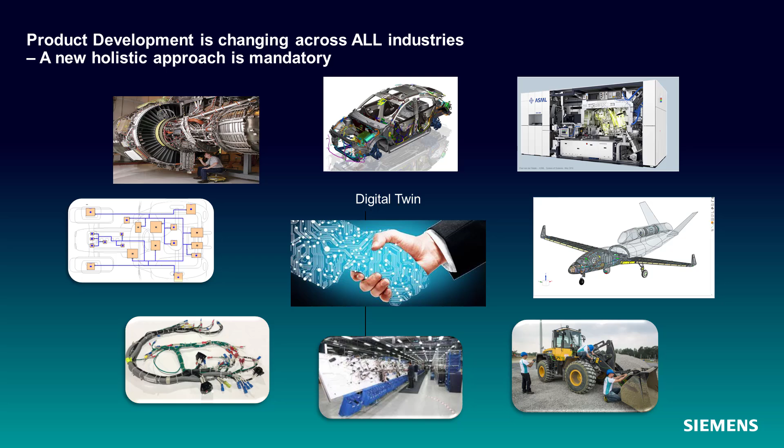To realize that digital twin, it's imperative that we diminish the boundaries between disciplines - mechanical, electronic, electrical, network, software, simulation - all these different environments we have walls that impede successful productivity and innovation. Correctly executed, we can remove those interdependencies, understand the handoffs between domains, establish traceability between them, and flow the data through to actually get to a product we can certify and know it did what it's supposed to do.

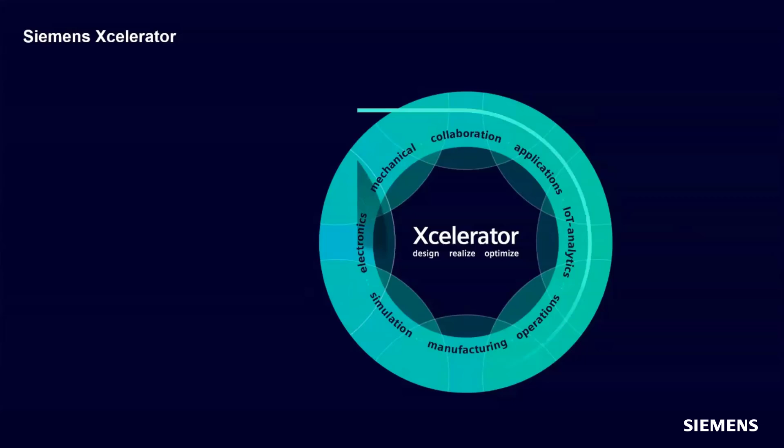The Xcelerator portfolio provides a best-in-class set of tools and methods for defining that digital twin, taking it from concept through design, through integration and manufacturing of the end product. Capital is the suite of tools that provides the EE systems environment portion of the Xcelerator portfolio, integrated into the overall Xcelerator environment to provide a broad solution to our customers.

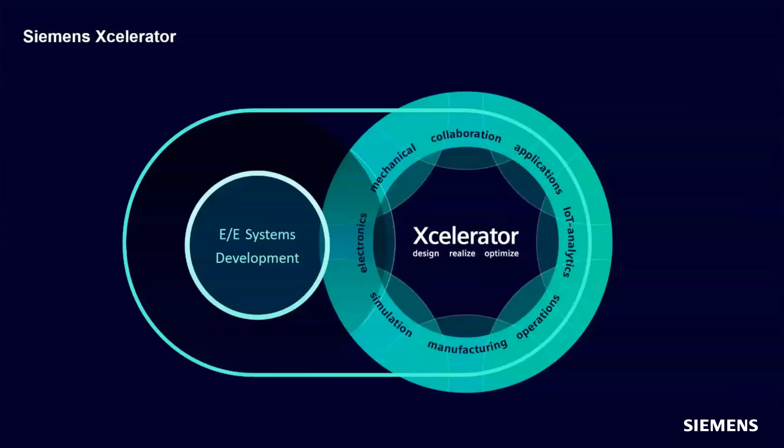At a high level, in EE systems development, there are three main areas you can divide it into. In the first stage, the system architecture is refined from early modeling inputs, enhanced with additional data and artifacts needed to optimize the EE design proposals, and then feeds downstream into two tracks - one implementing the electrical interconnect system, and the other implementing the software functions and associated networks.

We have a number of focused solution areas that refine those proposals out of the architecture during detailed domain-specific implementation flows, taking their domain-specific data to the next level of design. In the bottom part of that flow is where the electrical distribution system is designed both logically and physically, verified by construction methods, and prepared for manufacturing.

The manufacturing of electrical harnesses is a hugely complex operation, and Capital provides solutions that optimize that process. Following the entry of those products into service, customers need to be able to efficiently service, diagnose, and repair electrical systems, and Capital provides solutions that make that process more efficient than is typically possible without advanced tools.

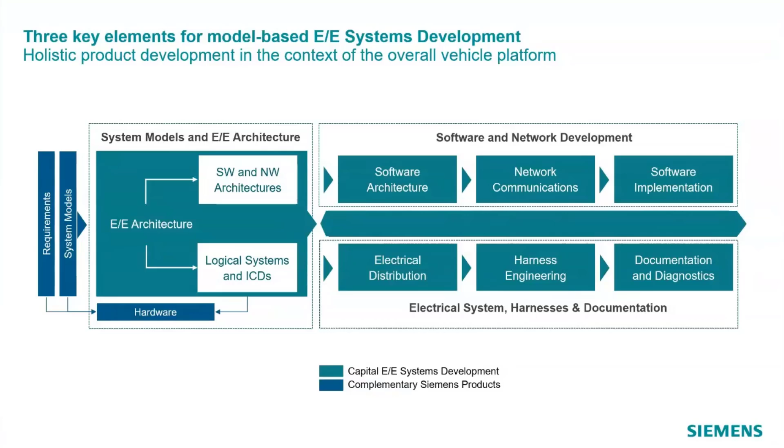Capital itself is a data-centric system built on data and process backbones that enable extremely high levels of automation, data coherency, and integration with adjacent domains. This EE data management system enables traceability, change management, and configuration management - an environment our customers have demanded and that we've built up over a number of years to satisfy those demands.

But the EE systems are part of the wider program lifecycle within organizations, and we provide deep integrations into PLM systems and other necessary domains throughout the product development process.

With that exploding complexity of EE systems, development happens in the context of model-based engineering. That's what Capital is all about - model-based engineering, not just model-based systems engineering, but model-based throughout the design process.

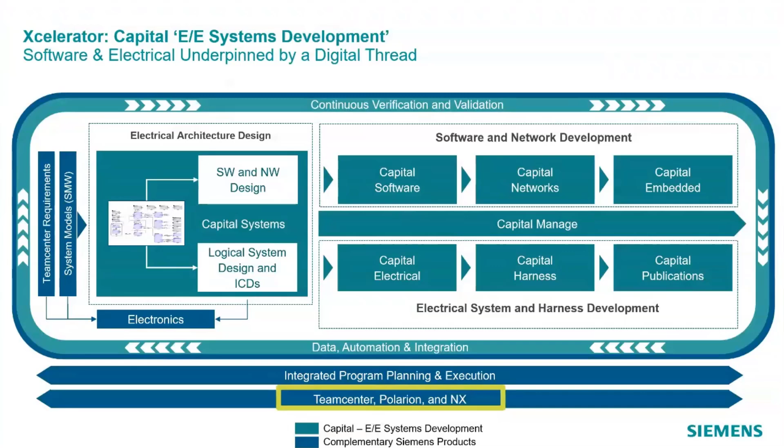To deliver this whole integrated system, we integrate with other domains to deliver that integrated system development environment into MCAD, PLM, and ALM systems. In today's session, we'll take a deeper look at three of those key integrations from Capital into the overall Xcelerator solution.

So let's start with Teamcenter and how this integration enables the EE data to be integrated into the overall product structure.

EE design is just one aspect of overall product design. In the context of the Xcelerator portfolio, it must integrate seamlessly into that overall product structure held in Teamcenter. Siemens' open architecture enables this integration, allowing data needed by all engineering disciplines to be mastered in Teamcenter, consistently used across all areas needing it, and ensures that products designed and implemented are based on a common understanding of requirements, features, variability and configuration, as well as providing an overall status of the various pieces that make up that product.

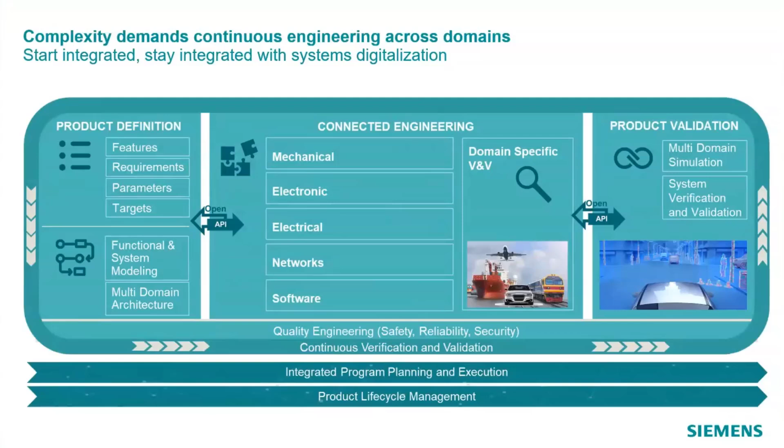As I said before in introducing Capital, Capital itself has a rich set of data management process control capabilities, and it allows us to be deployed into customers not using other PLM systems or not connecting EE to their existing PLM. But when we're in the context of a Teamcenter environment and a customer using Teamcenter, Teamcenter takes control over many of those lifecycle responsibilities, and Capital pulls back to concentrate on providing that EE design environment at which it excels.

In such a setup, Teamcenter is responsible for the lifecycle and approval process of both the components and parts used in the EE designs, as well as the designs themselves. The release and approval process is implemented via standard workflows in Teamcenter to ensure consistency with the overall product development lifecycle. Teamcenter also holds information relevant to multiple design disciplines, and Capital will merely use that data to drive the EE design and ensure consistency across the domains.

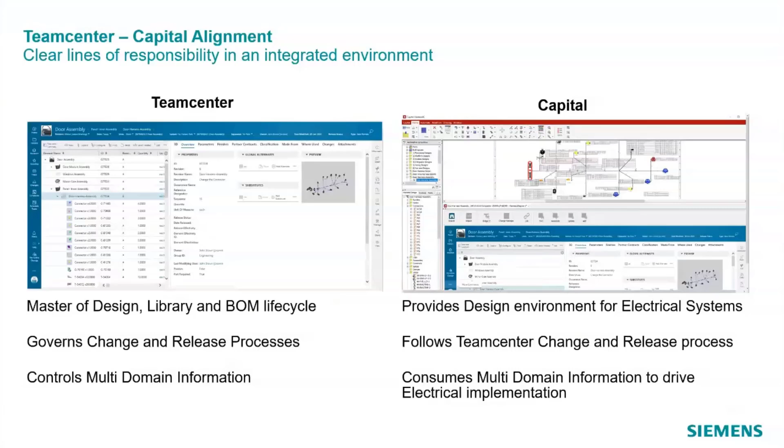One of the key aspects of Capital's integration into Teamcenter is the use of Active Workspace embedded directly in the design applications, providing direct in-tool access to the overall product information and to data published to Teamcenter, not just by Capital, but by other domains working on the design of the overall platform. Capital is able to add integration and application-specific icons directly in the Active Workspace frame to provide context-sensitive access to the integration features. We'll see how these are used later in the presentation to provide a seamless integration experience.

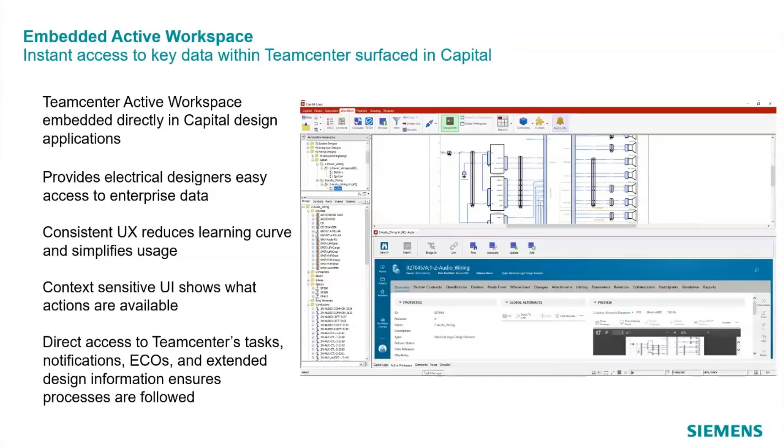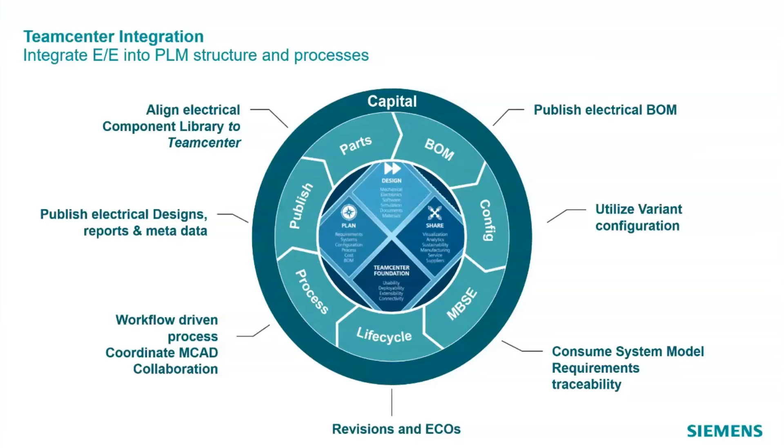Let's start at the beginning of the product development process with a definition of models representing system behavior. In order to provide an initial electrical systems design, we have the ability to take a managed System Modeling Workbench design from Teamcenter and directly read that into Capital Systems at the front end of that flow. This allows customers to reuse their functional or system definition from a systems model in the initial EE design. That initial design includes all the relevant system elements, connectors, and associations to Teamcenter requirements for the EE engineer to design their system.

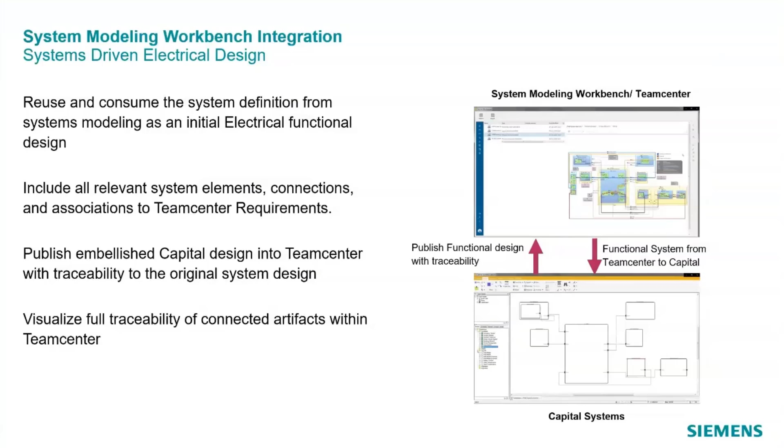Once complete, the EE engineer can publish the refined Capital design to Teamcenter and also capture traceability to the original system and system design. This allows anyone in Teamcenter to visualize the full traceability of all those connected artifacts. So System Modeling Workbench is that first integration.

The next piece involves managing the association of requirements in Teamcenter with the relevant objects implementing those requirements in Capital. In the case of the System Modeling Workbench, any requirements associated with the System Modeling Workbench objects are automatically carried forward and linked to the resulting objects in Capital.

However, even without using the System Modeling Workbench, users in Capital are able to use the embedded Active Workspace to navigate to the relevant Teamcenter requirements and establish links between the two. A little later we'll take a look at what that looks like, but actually in the context of Polarion.

From within the Teamcenter environment, even when not connected to Capital, a user can select the linked objects and bring up a web-based view of the Capital data, highlighting exactly where those requirements are linked. So you can come through Teamcenter and understand the full breadth of the objects implementing those requirements, and those associations can be used to validate that all requirements associated with their EE implementation have been fulfilled.

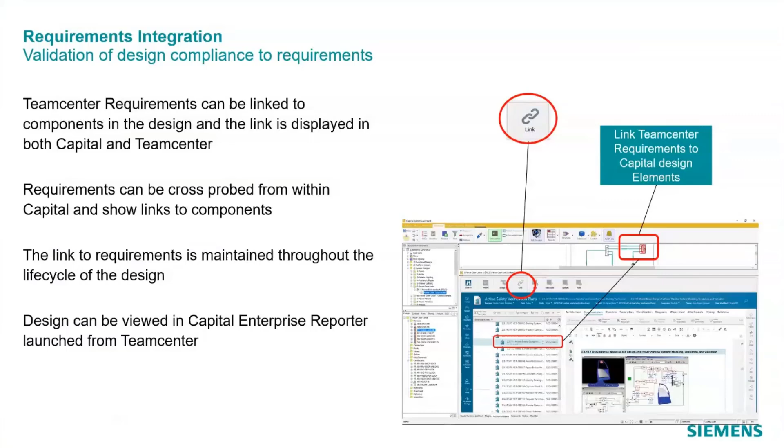Another area where Teamcenter holds the overall product information needed in the electrical design process is configurability. Teamcenter's product configurator is used to define the optional content in the platform as well as the relationships between those options, such as inclusive or exclusive relationships.

For example, a mandatory and exclusive relationship between the engines could be available. There are multiple choices for an engine, but you can only have one, and you must have one in your car. So the integration of product configurator allows these options and their relationships to be mastered in Teamcenter.

This is used to populate the Capital version of that model into the product plan in Capital. That data can be used to calculate the optimal set of configurations needed to cover all the electrical and mechanical variations. Then, using the powerful automation features in Capital, we arrive at an optimal set of manufacturable harness parts.

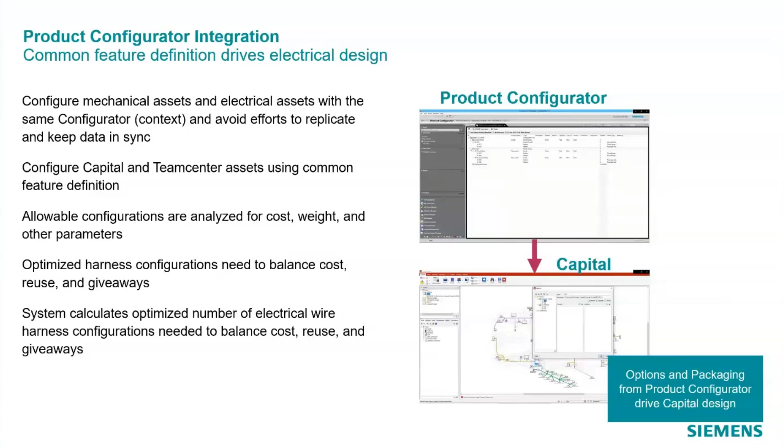The next area of this integration that we'll highlight is component libraries. Although Capital has a robust environment for entering component data with all relevant electrical information to drive the electrical design process and automation, the identity of a component across all applications using Teamcenter, as well as the life cycle of that component, is owned by Teamcenter.

Therefore the challenge is to ensure that Capital uses the same identity for the component as Teamcenter, so it can be correctly represented and included in the bill of materials. To achieve this, there are both interactive and automated ways to establish that link.

The interactive association and synchronization is achieved by embedding active workspace directly into our Capital library application. This gives the librarians in Capital the ability to navigate to the relevant components in Teamcenter, either to initially establish the relationship or to update the Capital component attributes based on the latest data held in Teamcenter.

The use of active workspace here also allows those Capital librarians the ability to see all other aspects of that part held in Teamcenter, not just the electrical aspects of it.

But to ensure those libraries are always in sync without manual intervention, the EDA library capability in Teamcenter is used to extract the updated components and automatically send them to Capital.

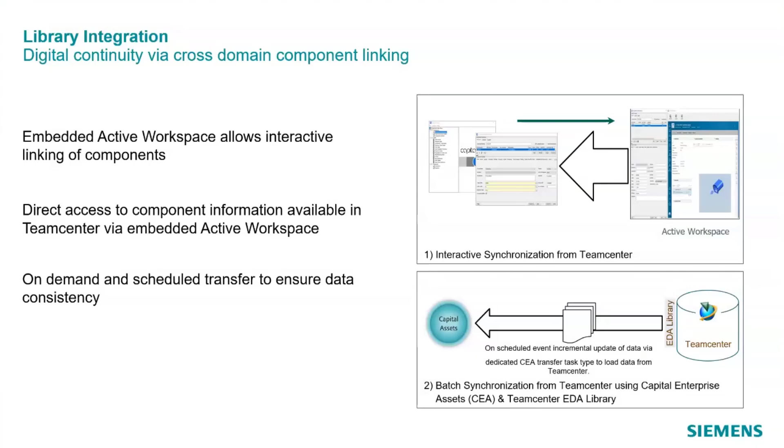With those links established to the component library and the Capital data model populated with the relevant cross-domain information, electrical designers can use the powerful automation and electrical design features in Capital to complete the designs and publish those results back into Teamcenter. There is a set of standard item and data set types for electrical that are shipped with Teamcenter that customers can quickly configure.

The default configuration in Capital uses those item and data set types when we publish to Teamcenter.

This is what we use for Teamcenter X deployment: out-of-the-box data set types defined in Teamcenter. Out of the box, Capital ships with those same data types. So for a new customer...

...it's all good. However, many customers already have these item types and data set types defined and in use. So we provide the ability to configure the integration to publish to any design type in Teamcenter as required. That configurability is key to enabling the Capital integration into any new or existing customer setup.

By default, Capital will publish a zip file of design XML representing the design for archival purposes, as well as a graphical representation, a PDF by default. Others are supported; however, customers can configure that integration to publish any report available within Capital, as well as having full plug-in capabilities to allow any type of data to be published along with the design itself.

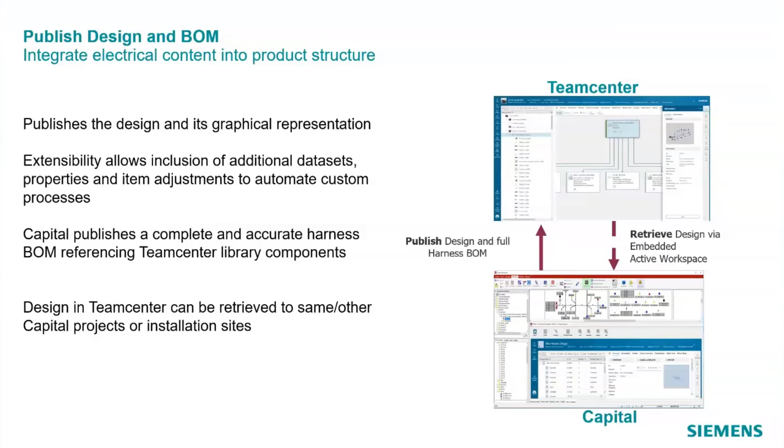So now let's move on and talk about the life cycle of Capital designs in Capital and how they can be controlled via what we call the Teamcenter driven design process. So in this flow, the creation and revisioning of electrical designs is initiated from Teamcenter to establish the existence and identity of an electrical design. So from within the embedded Active Workspace in a Capital design application, the engineer can navigate to an item in Teamcenter and create the Capital design that will implement that item and implement the required electrical connectivity, and eventually then publish the results of that design activity back to Teamcenter, as we talked about in the previous slide.

So this context-sensitive integration is achieved with additional Capital capabilities added to the embedded Active Workspace. And this allows users to create new designs in Capital from existing Teamcenter items, or associate an existing Capital design to an existing Teamcenter item. And then after that association is made, push any attribute changes from Teamcenter back onto the Capital design. So this is a process favored by many of our customers to ensure that their electrical designs are fully integrated into that overall product and really drive everything from Teamcenter.

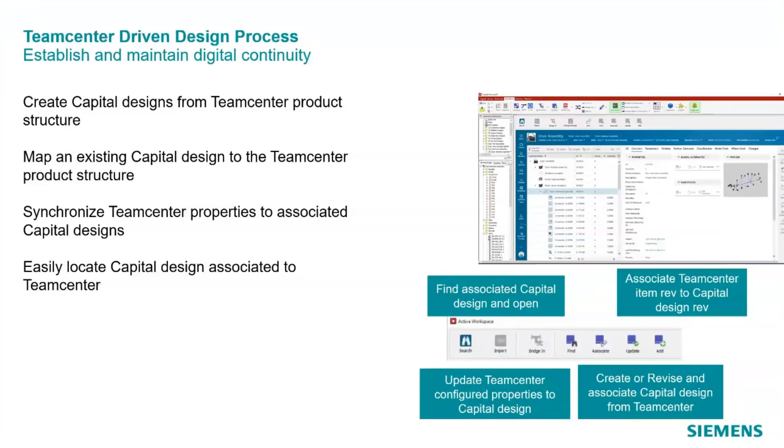And carrying on that theme of Teamcenter managing the life cycle of Capital designs, the integration also supports the use of workflows in Teamcenter. And currently there's two types of electrical workflows available, with example workflows that are shipped directly with Teamcenter. So the electrical design review workflow allows a Teamcenter user to progress a Capital design through an approval process and ensures the design in Capital follows the Teamcenter states to keep the release level on the Capital design in sync with the changes being made in Teamcenter. So that workflow also supports rejecting the approval and moving the Capital design back to a state of in work so issues can be fixed, and then the design can be republished and resubmitted to that workflow.

The second workflow is the electrical design revise workflow, and that's usually used for change management. And that allows a Teamcenter user to create a revision of the Capital design ready to have either new functionality or a defect fix to be implemented. The Capital user simply opens the target revision after the workflow is completed and starts his work. But in order to enforce process, Capital has the ability to set a preference that actually forces all design creation and revisioning to be driven through Teamcenter.

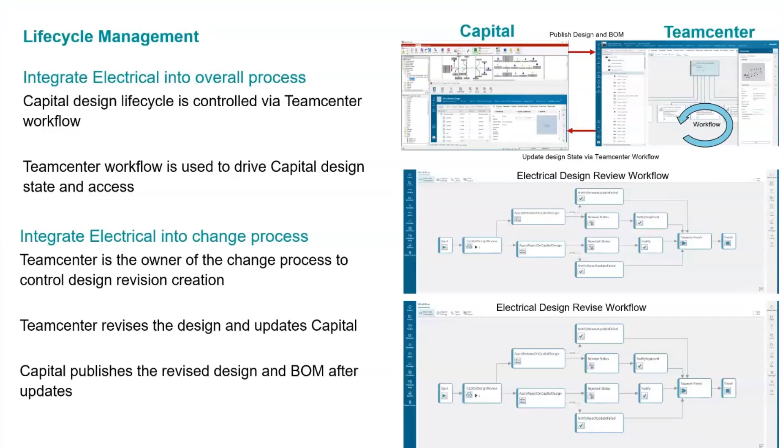And as a final piece of that Capital Teamcenter integration, Teamcenter can be used to mediate the exchange of data between Capital and NX. So instead of using uncontrolled methods of file exchange, the operating system or email, the data can go directly into Teamcenter, where either application can access it in a configuration controlled way, ensuring the right files are being used from the right revisions of both sides. So when Capital is connected to Teamcenter and the data is bridged out, it'll automatically be placed into Teamcenter instead of to the file system, under the item that we're publishing. And then in the embedded Active Workspace, you can navigate and bring data from NX directly back into Capital.

So hopefully you've seen here, the Capital integration with Teamcenter has many touch points to enable that digital thread to be created, maintained, and leveraged to integrate the electrical data into that overall product structure. So at this point, I'd like to hand the presentation over to Tanya, and she'll take us through the NX related integrations.

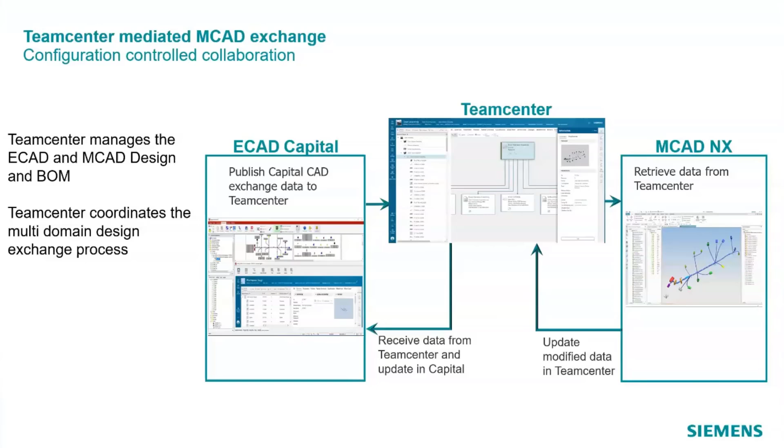Thank you, Glenn. Moving on now to the topic of integrating electrical and mechanical design processes. Let's discuss how NX Capital integration strengthens the Xcelerator offering around electrical design. Just as there are benefits to be gained by integrating electrical data into Teamcenter, there are also benefits to breaking down the silos between mechanical and electrical design.

As you see here in the results of an engineering.com research report, 72% of teams say an integrated electrical and mechanical design environment can significantly reduce product delivery time. Why is that? In many companies today, electrical and mechanical design teams work separately, and therefore the integration is done late in the design process.

This results in either rework to the physical structure of the platform that can be very costly, or more likely a suboptimal integration of the wiring, which results in some of the electrical characteristics not being accounted for in the initial design. In either case, there is an impact to schedule and quality. So it is essential to obtain seamless integration, enabling ECAD-MCAD co-design across the Xcelerator portfolio.

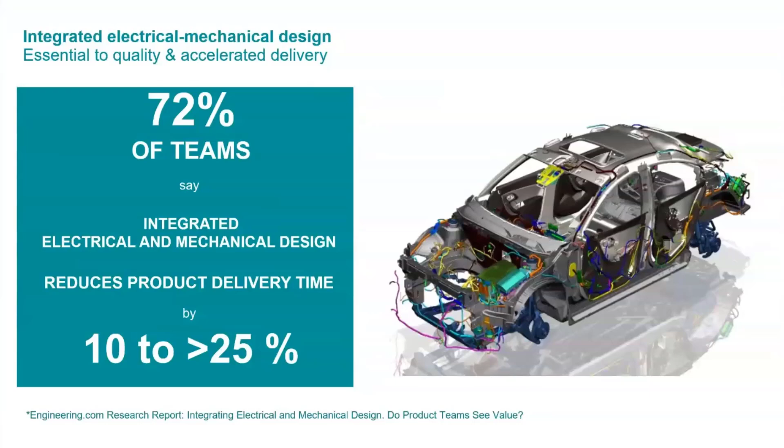In most design flows, engineers are typically working concurrently on designing the physical harnesses in NX, and electrical connectivity is being defined and designed within Capital. So NX is responsible for defining the physical geometry of the harness, the fixtures and fittings, and ensuring that there is sufficient space in the vehicle for the harness to be routed and fitted.

Whereas Capital is responsible for mastering the electrical connectivity and subsequently fully defining the harness as an electromechanical product. The NX and Capital electrical data are then combined to make manufacturable harnesses. So the collaboration between these two tools is key to enabling a precise concurrent design.

Capital tools have many touch points with NX across all domains like Capital Logic, Topology and Integrator, and Harness XC or Modular XC. Capital provides a robust and flexible set of integration capabilities to enable the digital thread to be created, maintained, and leveraged to integrate electrical data. With Capital Logic, we have the ability to send wires to NX and have them routed and returned. In the topological tools, we can import the bundle topology and have routed or synthesized wiring. We can then calculate bundle diameters and splice positions and return them back to NX.

And finally, with Capital Harness XC and Modular XC, we can pull the full mechanical description of the harness parts, including bundle protections and supports, and have the wiring synchronized. We can then calculate bundle diameters and splice positions and return them back to NX. So this process also eliminates the need to have any wiring in the MCAD tool if desired. This separation of data means that an NX harness will not need to be modified and rechecked whenever low-level electrical changes happen. So this reduces the overall number of design change approvals that are needed to implement a change and improves the overall design time.

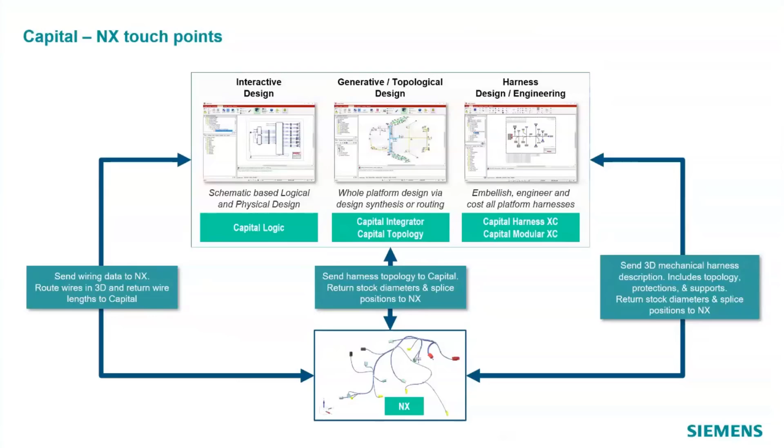So all these integration capabilities are enabled via a combination of our bridges framework and adapters, which handle the exchange of information between NX and Capital. On the left, we have a set of plugins using MCAD application APIs, and they are deployed within the MCAD tools. We have the bridges framework with its adapters that are able to understand what comes out of the MCAD products. And then we have our patented flattener that is able to transform between the 3D representation from the MCAD product to the 2D representation we require.

And finally, we have change manager that is able to understand the difference between the received set of data and what's already in the design. So the goal of these integrations is to ensure that key data shared between electrical and mechanical designers is aligned early in the design process and stays aligned as development continues. In order to address this, electrical and mechanical designers need to exchange data as early as possible and then iterate, as there will be outside forces driving change in both areas. So change management is a fundamental backbone to these ECAD-MCAD integrations. We'll look at it in more detail in the later slides.

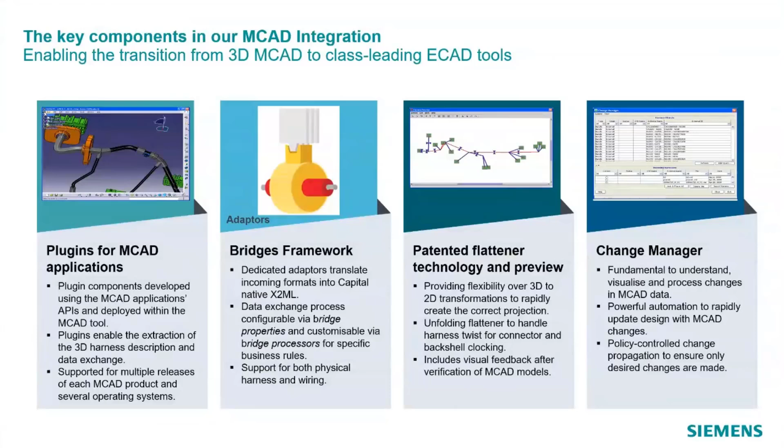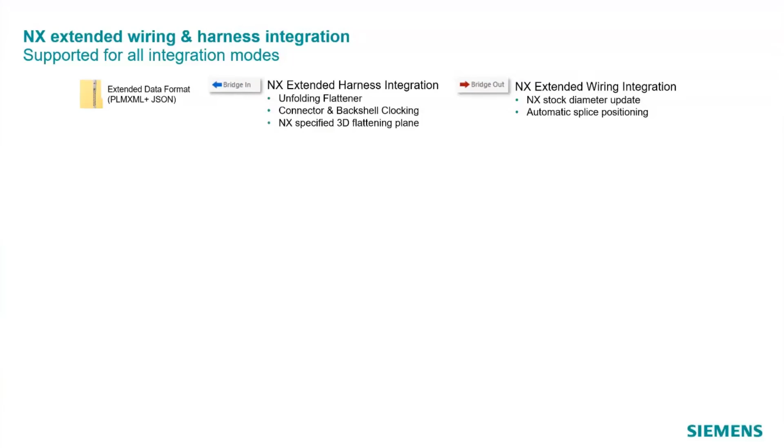The extended wiring and harness data integration is supported between Capital and NX now, enabling world-class integrations with NX compared to integration with non-Siemens MCAD tools. This extended integration enables CAD zip file exchange, the format being PLM XML and JSON files contained in a zip. By adding a JSON file to the data exchange process, we are able to integrate new capabilities like unfolding flattener, connector and backshell clocking, and NX-specified 3D flattening plane. And during bridge out, this format enables NX stock diameter updates and automatic splice positioning. So there are multiple ways to accomplish the integration depending on organizational requirements.

We have file-based mode, connect mode, direct Capital Navigator mode, and Teamcenter-mediated MCAD collaboration mode. In connect mode, we can directly connect the electrical application to NX to exchange data and understand the electrical routing in the physical context by cross-selecting between the two tools.

In Capital Navigator mode, the user is able to access Capital data right within NX without having access to a separate Capital installation. And another method of integration is to use Teamcenter to hold the files to be exchanged and the embedded Active Workspace in the Capital application to navigate to the desired version. This provides a structured file-based exchange as opposed to a pure file-based exchange where there is no guarantee on the source or the version of the file being imported.

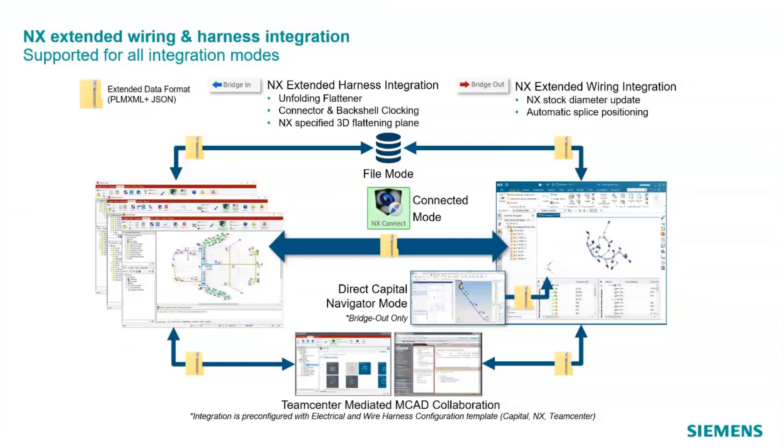Moving on, let's see how the Siemens Xcelerator portfolio aids in the ECAD-MCAD co-design process. This is the first use case in the NX Capital integration flow. The basic idea here is that Capital is the master of electrical content and NX takes care of 3D harness models. The ECAD designer begins by creating the wiring and connectivity layout in Capital. This layout includes key components such as wires, connectors, multicores, and splices.

The designer then exports this wiring data to the mechanical engineer. The mechanical engineer imports this data and NX automatically links the electrical data to the 3D objects. Then we can route the wiring through the platform, enabling bundle diameter calculations to take place. When ready, a file containing these incremental changes is exported for review by the ECAD designer.

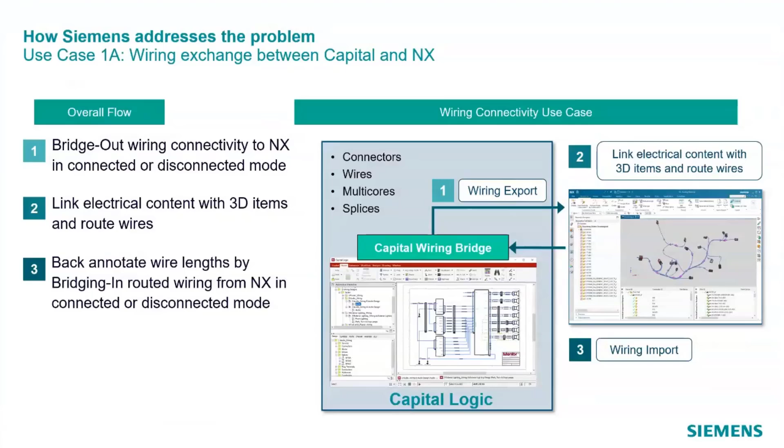The ECAD designer then imports this data and performs a number of checks on the design. The designer can use the 3D wire length from NX to perform voltage drop calculations and ensure that enough space has been reserved in the mechanical design to fit the wiring bundle. Changes can be made as needed, and a new incremental file can be sent back to the mechanical engineer. And this flow can be achieved either by connect mode or file-based mode.

And this wiring exchange use case that we have just seen can also be achieved by direct Capital Navigator integration. This mode allows the MCAD user to access ECAD information without having access to the Capital application. In the previous integration scenarios we have looked at, the integration was achieved either in disconnected or connected mode. The disconnected mode relies on the exchange of an intermediate file to bring Capital data into the MCAD application, while the connected mode doesn't require an intermediate file but still requires access to a running application. In both cases, the MCAD user has to switch between NX and Capital to exchange data.

Now with Capital Navigator, the user is able to access Capital data right from within NX, removing the need to have access to a Capital installation or even knowledge of using the Capital tool. This is key to enabling collaboration and co-design between ECAD and MCAD domains and strengthens the digital continuity through the product design phases. The steps in this flow are: first, wiring data is read from Capital by selecting the appropriate harness filter, and then connectors are assigned in NX and wires are automatically routed.

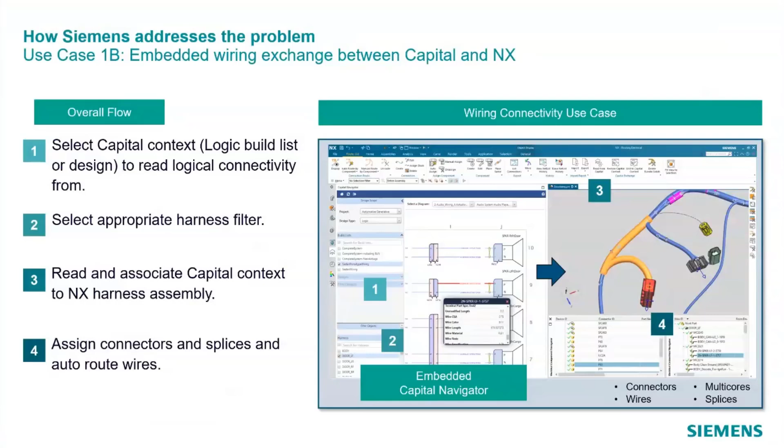And the next use case is harness exchange between Capital and NX. Harness description from NX, including bundles, supports, and protections, is imported into Harness XC via Change Manager. Change Manager is used to control the incoming data. Then the harness is flattened as desired and processed into the harness design. Wires are not present in this harness design because of change policy settings.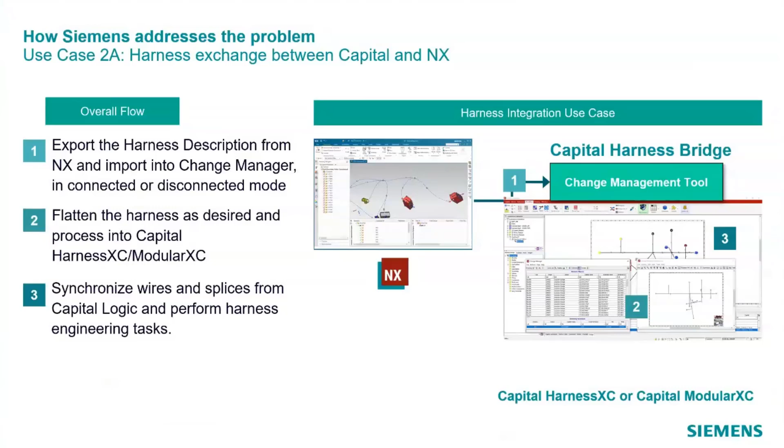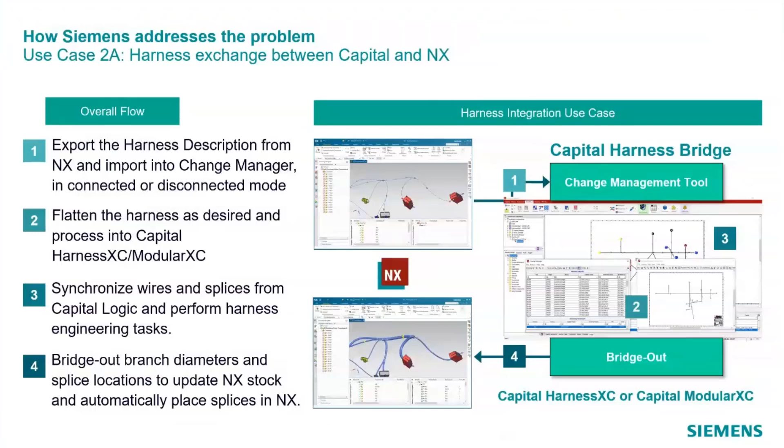So the harness is synchronized with the Capital wiring design to get wiring information. And then bundle diameters are calculated using the synchronized wiring and splice optimization can be done. So these new bundle diameters and updated splice positions are exported back to NX. So in the same way as before, the bundle diameters and splice positions in NX can also be updated by the NX designer using embedded Capital Navigator.

In many companies, NX has been used as the container for electrical data, even though it is not an electrical design tool. This can cause excessive design sizes as the wiring connection data has to be fully implemented and saved in the NX model. In some cases, this leads companies to split the harness across zones to manage the data sizes. To address this issue, we have introduced the ability for NX to contain only the harness structure and connectors and to visualize the wires defined in the electrical model in the context of the NX harness.

This allows the NX user to see the wire routes and evaluate splice locations in the context of the 3D model to ensure that they'll correctly integrate. In addition, to facilitate clearance checks and other analysis, the bundle diameters calculated in the electrical data can be applied to the NX model so that accurate bundle diameters are shown. This flow is also possible in connect mode or file-based mode.

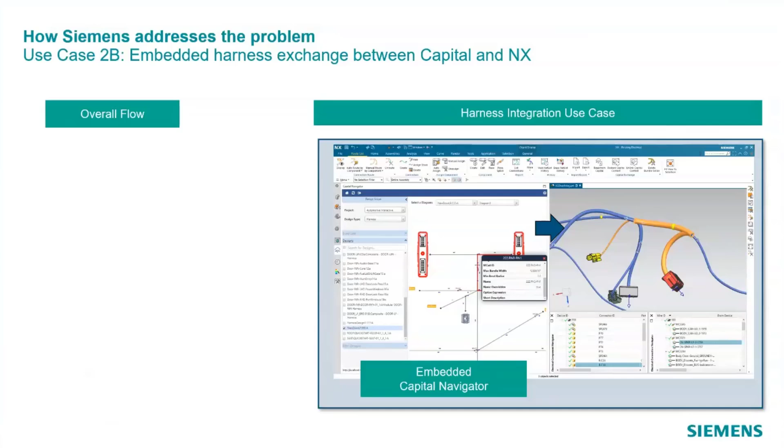So as you see here, after all the harness engineering tasks are done within Capital, the MCAD engineer can get the latest design data within the NX application. The user can apply Capital context to his NX electrical assembly, enabling automatic splice creation and positioning, and bundle diameter updates in NX based on wiring content.

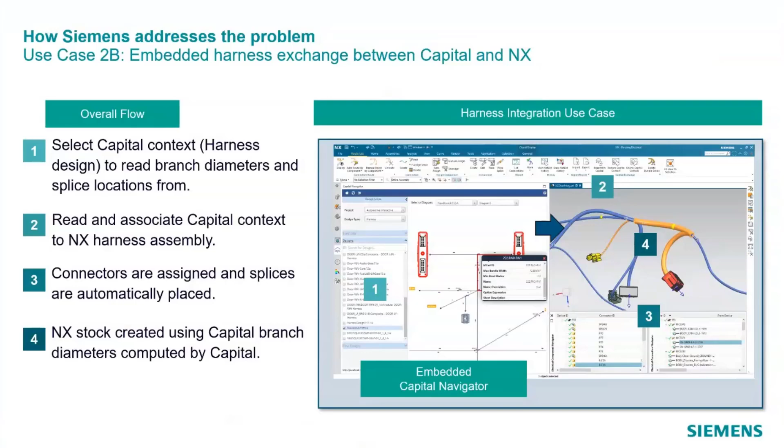So a key element in realizing these integration capabilities across multiple domains is powerful change management. Clear ownership of various types of data must be established and can then be captured in digital form to define the rules of exchange. With these rules in place, a designer in Capital can proceed with adding detail to a model whose physical structure is defined in MCAD without fear of that work being lost at any integration point.

So bridging in of design data into Harness XC or Integrator is enabled through the Change Manager, which is a preview, validation, and change control interface that allows linking harness objects with externally sourced entities, as well as synchronization of changes in shared data subject to a change policy if required. The Change Manager facility enables you to link bundles from your Capital design with their corresponding bundles from the external source.

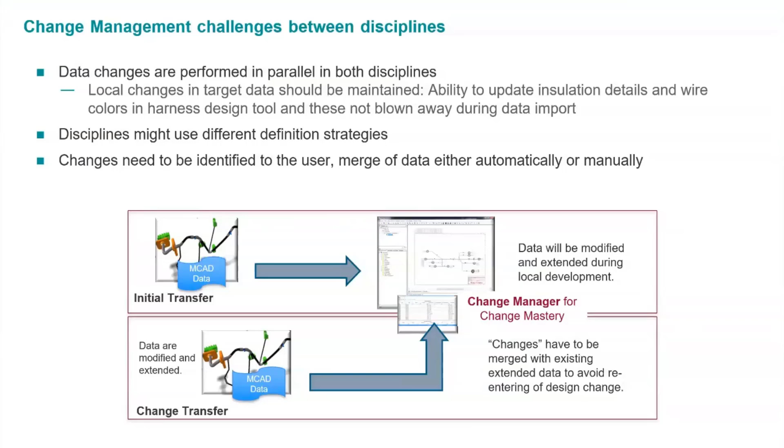When you link a bundle from an NX design with a bundle from the Capital existing design, the properties for which the master source is the Capital application remain on the object in Capital, and the object properties for which the master source is the external application, for example, length, will be overwritten by the value from the external harness data.

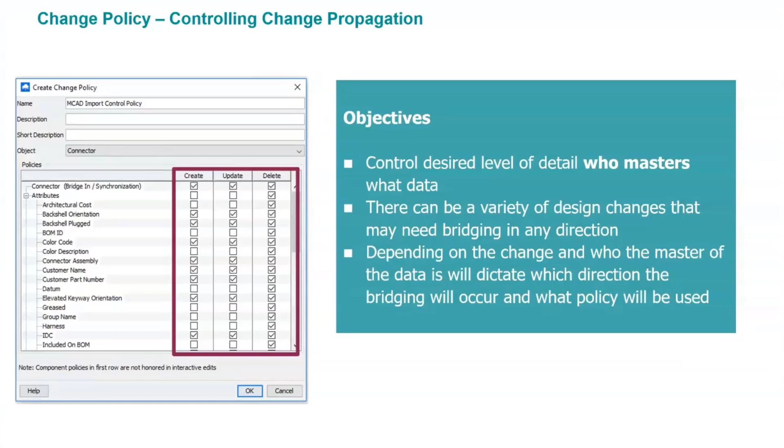So change policies allow you to control the way in which changes are to be propagated during harness synchronization and bridging processes. They can also regulate which objects are permitted or prohibited from being created, updated, or deleted. For example, when we are bridging in NX topology data and we do not want to get wires from NX, we can create a change policy to not create, update, or delete wires. And when this change policy is used during import, wires will not be updated based on the incoming data.

Here is an example that demonstrates how powerful Capital's Change Manager is in handling data changes. We begin by adding an insulation to an existing bundle in Harness XC, and then we change the bundle structure in NX. Here the goal is to propagate the change in bundle structure in the harness to Harness XC without deleting the insulation that is added in XC. So now we are changing the bundle topology within NX. The wires are automatically routed.

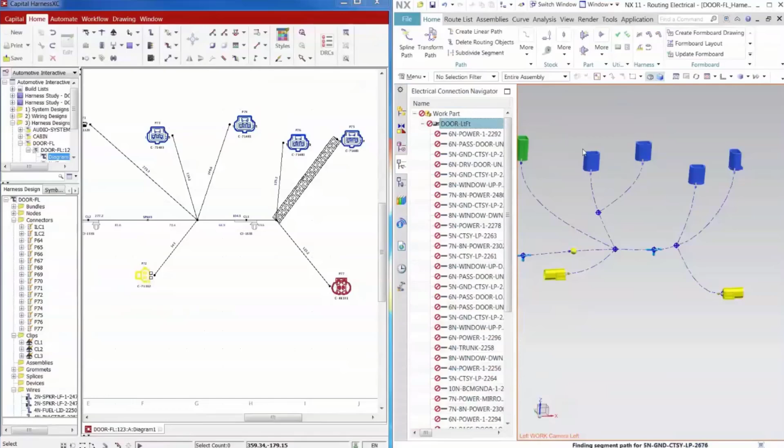In Change Manager, you can flatten the harness as desired, and it also shows a preview of incoming data and all the changes that will happen if the external data is processed. So when we import the new, modified data from NX, you see the change in bundle topology in the preview window, but not within the Harness XC design.

And then we have a change policy to not create, update, or delete any insulations based on incoming data. So this change policy is used during import. Once the harness is processed, you'll see that the topology change is reflected in XC, but the insulation data is retained.

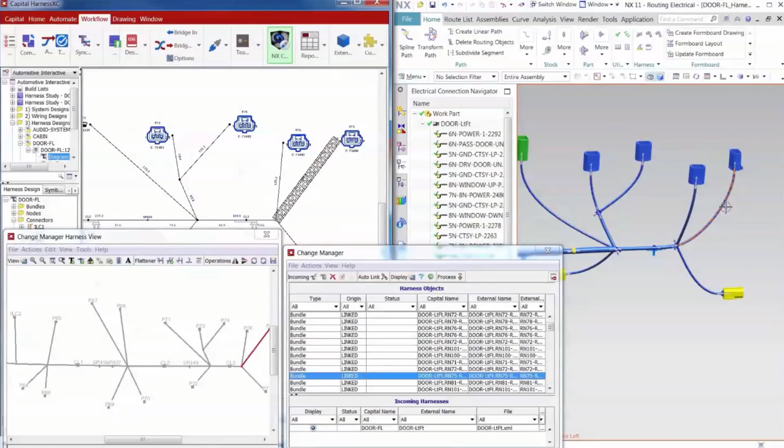And as seen in the previous video, we have various ways of flattening the incoming 3D harness topology. Orthogonal flattening is the standard style of harness diagram for engineering. It projects 3D coordinates of a harness model onto a 2D plane while laying out the branches perpendicular to each other. And then we have 3D flattening that keeps the 3D representation of the harness as close as possible to the original 3D layout. This closely matches the NX harness shape and is often used in the topology or integrated plane to retain a realistic representation of the harness.

And we have the unfolding flattener that straightens all bundles while recording the rotational displacements used during the flattening. This allows the clocking of connector keyways and of backshells to be preserved.

Backshell and connector clocking angles are needed to achieve the desired installation shape and can only be defined by MCAD. So representation of these angles on harness drawings is crucial for harness fabrication. We now have NX extended integrations to support connector and backshell clocking.

In 2D harness drawings, the clocking angles are computed with respect to the flattening plane and visualized on the connector using styling capabilities. The clocking computation is done with either unfolding flattening or orthogonal flattening methods. When orthogonal flattening is used, the harness is still unfolded using the unfolding algorithm to track clocking angles, but then laid out using the orthogonal pattern.

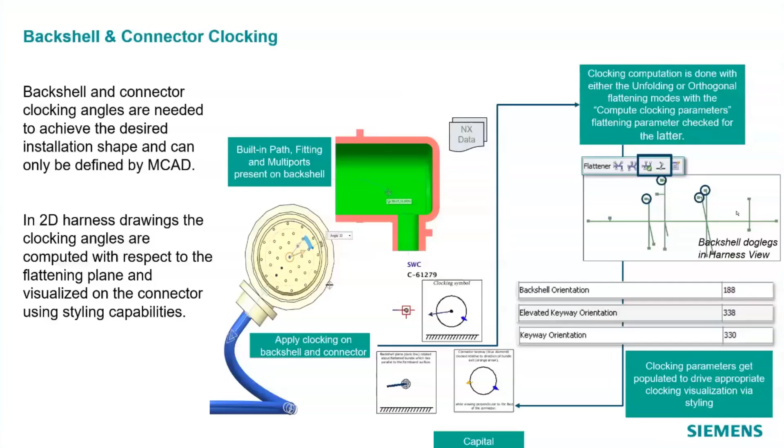Finally, I'd like to highlight the importance of ECAD-MCAD collaboration. It enables co-design across multiple domains and is a driving factor to achieve productivity and design quality. This role is seen as key for industries facing a rapidly evolving future. Blurring boundaries across engineering, manufacturing, and service is crucial to improve quality, accelerate product development, and optimize the process over the life cycle.

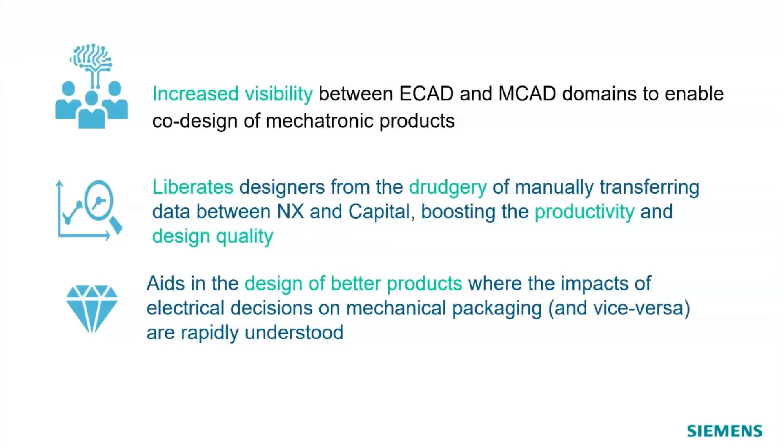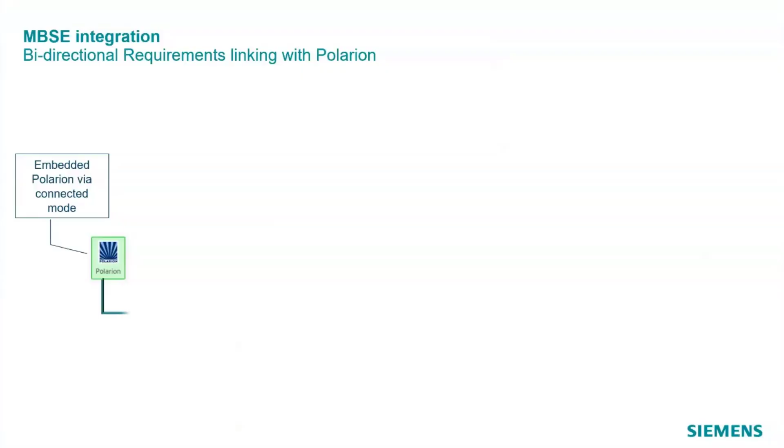All right, thanks, Jitanya. Let's wrap this up with Capital integrations into Polarion for requirements management. Similar to the Teamcenter integration using the embedded Active Workspace, the Polarion browser is embedded directly into our design tools and provides an integrated experience for the designers, allowing the user to browse for requirements or work items.

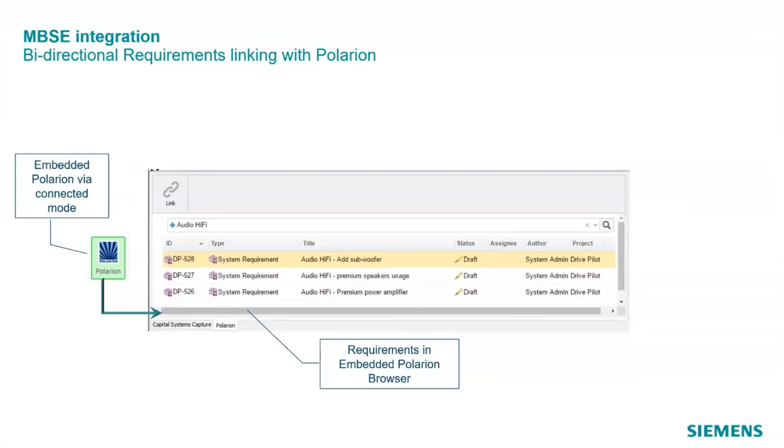And then from a Polarion work item revision, the integration automatically enables the linking capability. So the link action requires a Capital design to be opened, and then on invocation, Capital provides an environment where the user can manage and select the Capital objects that are the targets where that work item link needs to be created. So what item in Capital is implementing that requirement?

And the link action is available for all work item types which are configured in the Polarion properties. We've talked about requirements management here, but actually any type of work item can be configured to be linked. The user just selects the objects in the Capital design for that association and then proceeds with the link creation in Capital.

And then in the Capital links tab, you'll see there in the browser, it lists out all of the established links and enables you to visualize the Capital design with hyperlinks and filtering capability. So that link tab also provides the actions to manage and update those links.

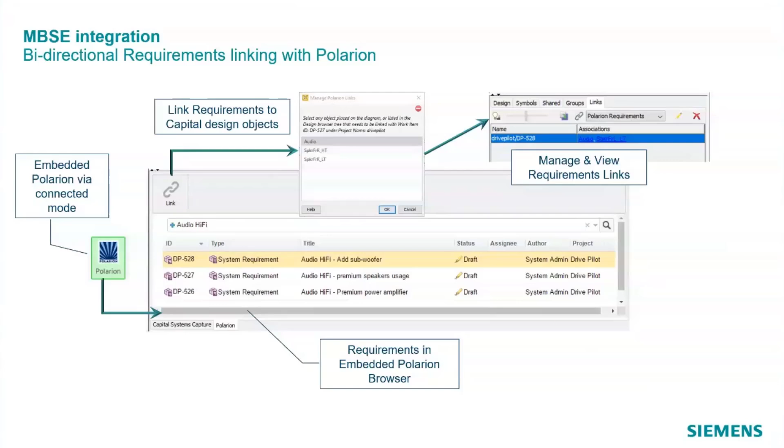So the view requirement action will automatically open an external Polarion browser, locate and open the selected requirement revision, and then in the hyperlink section of Polarion, you can inspect on the Polarion side the bidirectional storage and linking to the Capital objects.

But during development activity in Capital, there might be the need to change the associations to the design objects that are implementing that requirement. So the edit association action also allows you to adjust and reassign the design objects and then automatically update the requirement on the Polarion side.

And then Capital commands like export, import, revise of a design will create new design revisions, and the requirement links can be taken forward into those new designs in Capital. And that reconcile requirements action ensures that the links available in the Capital design are reflected on the Polarion side to ensure correct bidirectional linking.

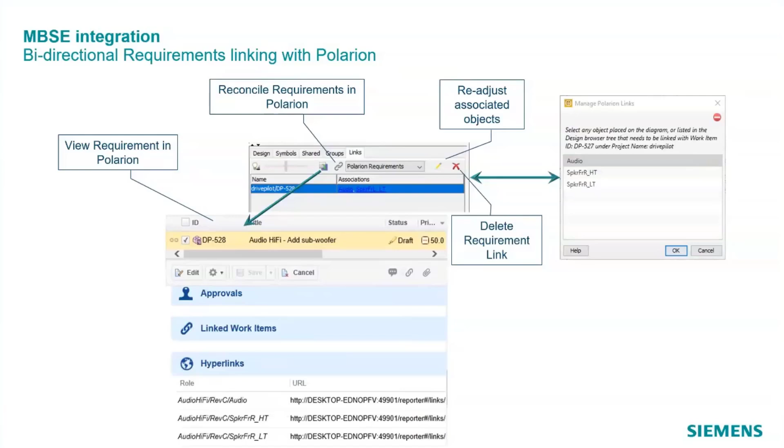Removal of requirements on the Capital side will also automatically update the Polarion requirement and reflect that change. So that bidirectional linking enables the Polarion user, completely outside of a Capital environment, to view the associated Capital object. So on the stored relation in Polarion, the available hyperlink will automatically view the data using our Capital Enterprise Reporter application, web-based application reporting.

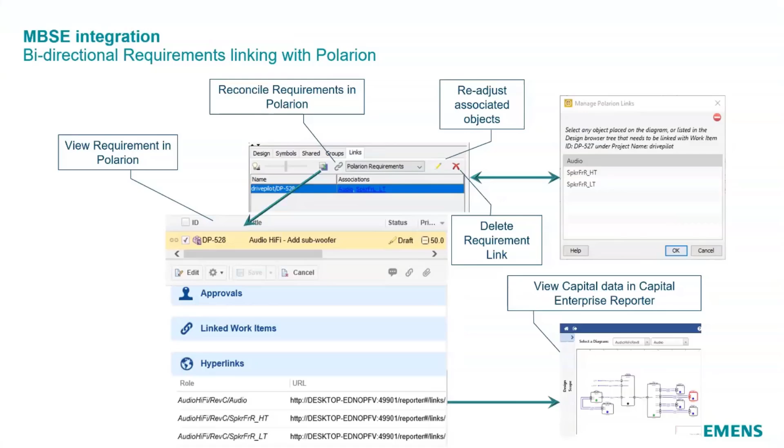All right, so those are kind of the three key integrations, and I'd just like to recap here on the items we covered. Capital itself has very rich electrical data management and is a model-based design environment, and enables that digital thread. The integration into Teamcenter really allows the EE to participate in that overall product structure, and then those integrations with NX break down the silos between those electrical and mechanical designs and really achieve this integrated design process.

So I think taken together, these capabilities really enable our customers' ability to realize a model-based enterprise, not just model-based systems engineering, but model-based engineering across the enterprise, and to implement that digital twin. And that really is what makes Xcelerator the leading solution in the market.